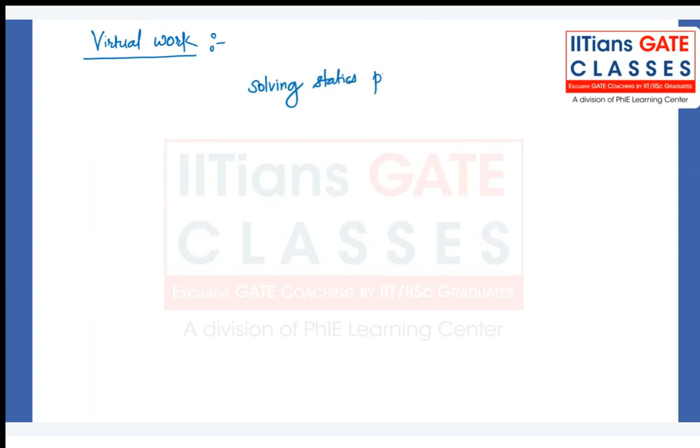So, solving problems of statics - there are two ways to do it, either with the equilibrium equations. You know, equilibrium equation, summation of all forces equal to 0, summation of all moments equal to 0, right? Depending on direction, you will apply summation x, summation y, and all. And there is one more way, that is virtual work method.

So it is not mandatory that the problem should be solved by virtual work only, and that is the reason we have not studied it when we were studying the statics problem. Generally everyone prefers the equilibrium method, and it is commonly used to solve the problems. But there is an alternative method. You should be aware of it, and you may not be using it in future, but it will be good that you are aware of this. So that is the reason we are studying it here.

It's optional, not necessarily required - you can still solve the problem with the equation of equilibrium, and we use it in statics mainly.

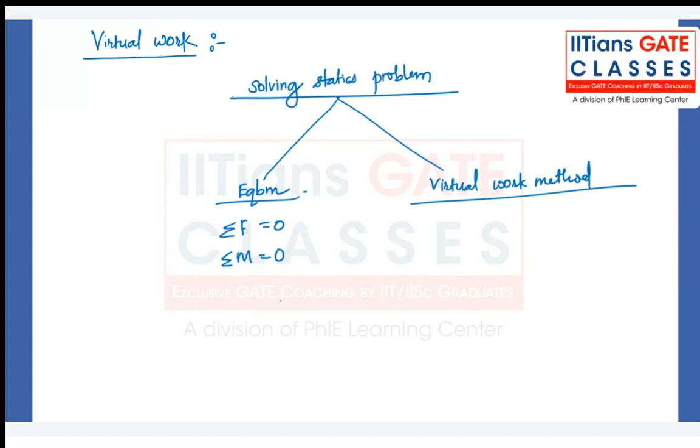So when a body is in equilibrium, there is no displacement, we can say. Body is at rest, and then we say it is in the equilibrium, and summation of all forces and moment equal to 0. But if we imagine a displacement, let's assume a displacement, let's call it a virtual displacement.

What is the virtual displacement? You can denote it by delta theta or delta s, whatever you want - you can give the notation. Generally delta s and delta theta are used for linear displacement and angular displacement respectively. This virtual displacement is an arbitrary, infinitesimally small change in the position of the particle.

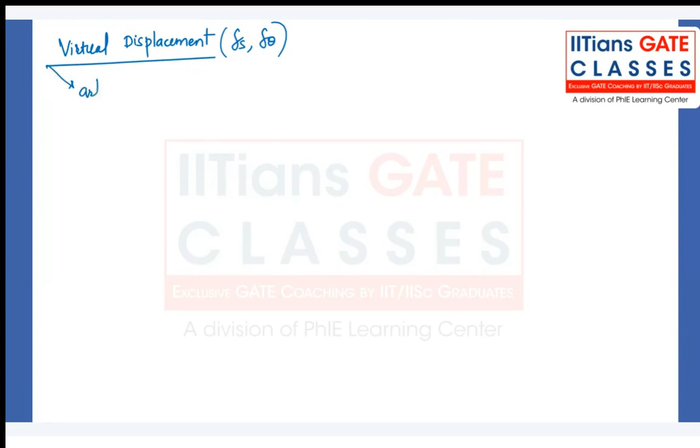And consistent with the constraint imposed on it. So write down the definition of virtual displacement: virtual displacement of a particle is an arbitrary, infinitesimally small, very small change in the position of the particle, consistent with the constraint imposed on the particle.

So it's an imaginary displacement. In reality it is not happening, because the body is in equilibrium, it is at rest, it is not moving. But in order to solve it, we are assuming, we are imagining that there will be a small displacement, let's say delta s, and that will help us to calculate work, because force into displacement is work, and it will help us to solve the problem.

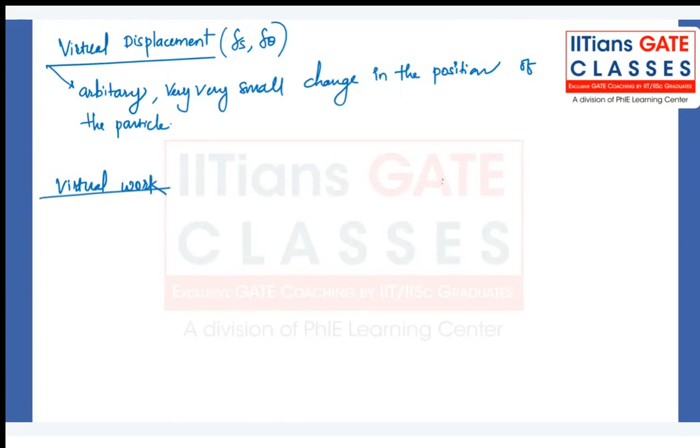So if we have a body like this, kept on a horizontal surface, and a force P is applied, and the body has an imaginary displacement delta S, then the work here will be P cos of theta.

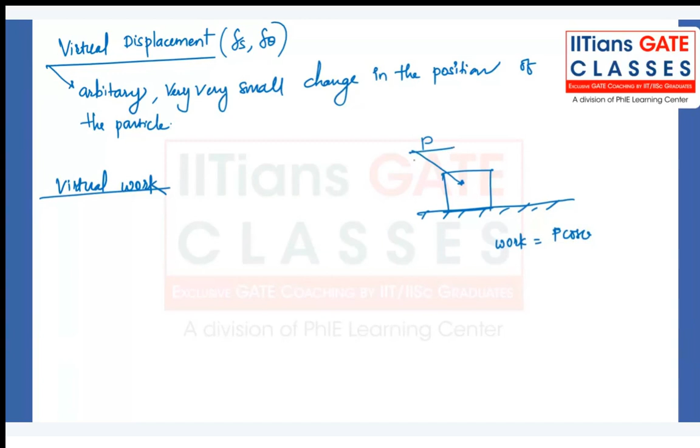P cos of theta into delta S. Delta S is a virtual displacement. This work I'll call virtual work.

Similarly, if we have a beam and you are applying some moment on it, and because of this moment there is a small change in angle, that is delta theta, then the work done because of this moment is moment into theta, and in this case I'll call it virtual work.

So what is virtual work? Virtual work is the work done in producing a virtual displacement.

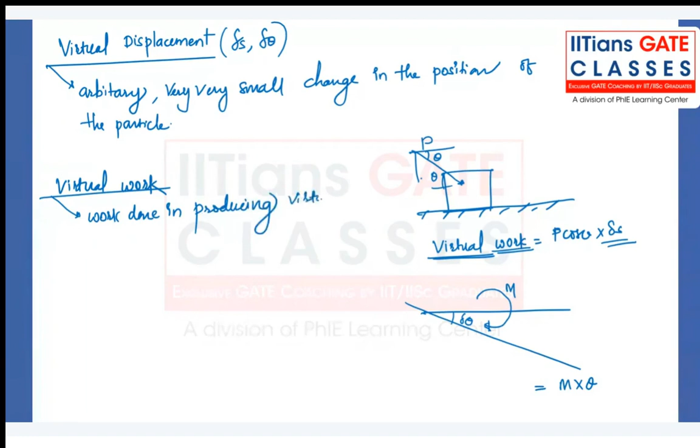So delta U, let's say virtual work, generally we denote it by delta U, and that is equal to F times delta S. Now we know what is virtual displacement, we know the force, and we also understood virtual work. But what is the principle of virtual work?

What does this principle say? Write down the heading: principle of virtual work.

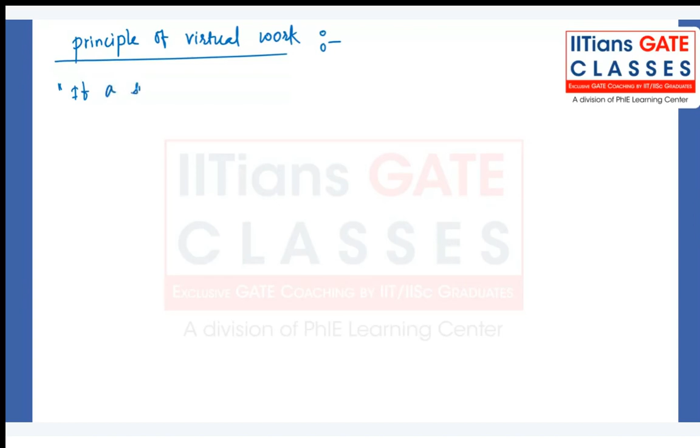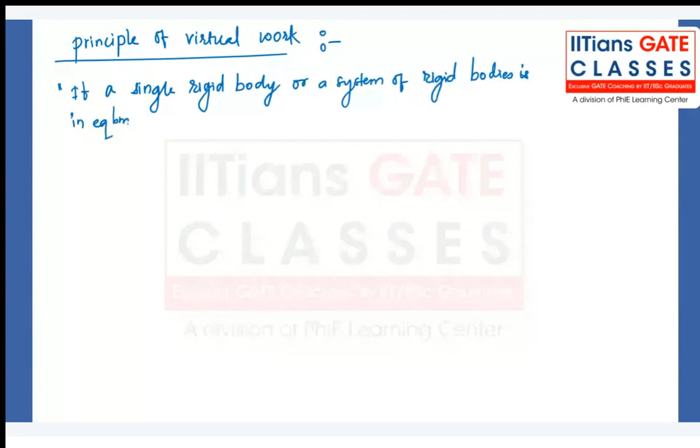If a single rigid body, or a system of rigid bodies, is in equilibrium, then for any virtual displacements within the constraints on the system, the virtual work done on the system is zero.

So this is the statement of the principle of virtual work. In short, the total virtual work of external forces acting on the body is zero.

Or in other words, constraint on the system means the supports which you are giving. So you are, let's say, giving a fixed support at one end, or a roller support at the other end, and keeping it the same. It means your reactions will remain the same, they will not change.

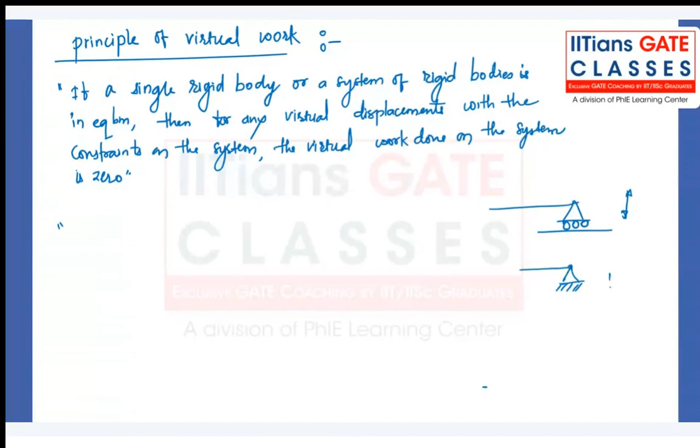So whatever constraint means, let me explain: if you put a roller support, it means you're putting a constraint on the virtual vertical motion of this beam. If you put a pin joint, you are putting a constraint not just on the virtual vertical displacement but also on the horizontal displacement. And if you have a fixed support, then you are constraining the vertical direction, the horizontal direction, and also the moment.

So constraint means whatever restrictions you have made in the problem before, they will remain unchanged. Is it clear? Constraint is the opposite of freedom, degree of freedom.

So in other words, in simple words, the statement can be written as: the total virtual work of external forces acting on the body is zero, for any virtual displacement of the body.

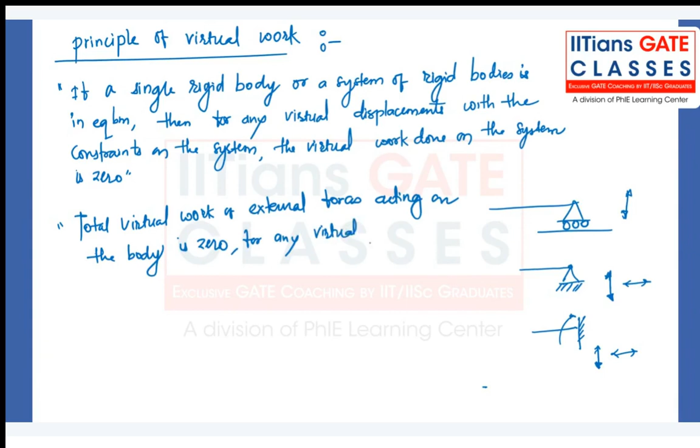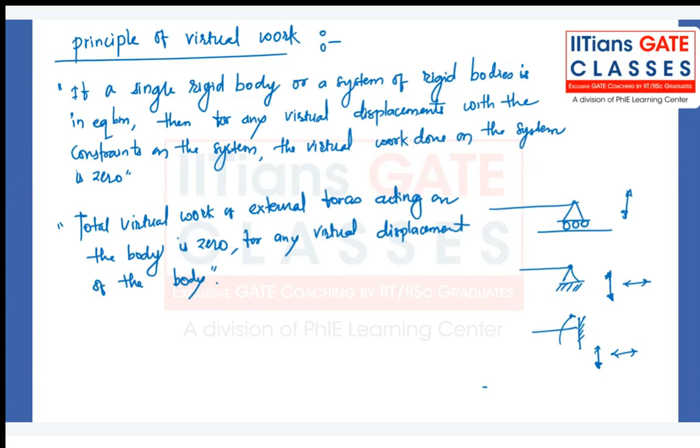So in this way also you can write the statement. Let's start with a simple understanding of it. So if I give you a block and ask you to apply the equilibrium equation to it.

Suppose if I put a block of weight W and ask you to calculate the reaction because of the ground, so what you will say is: this block is at rest, it is in equilibrium, so the summation of all forces in the vertical direction has to be zero. The ground will create a vertically upward reaction, that is N, and hence N will be equal to the weight of the body. That's all you will say, right? There is no need to do any complexity in this.

But now, if you want to apply the principle of virtual work to this, how will it look? So let's say this is the centroid G, and imagine that G is moved because of the weight to G dash, something like this. There is a change in position in the vertical direction from G to G dash, and this position change is delta Y. So in the y direction we assume it as delta Y.

So what is the work done because of this virtual displacement delta Y?

Displacement is downward, weight is also acting downward, so it's a positive work, W into delta Y. Force is up, reaction is upward, so N times delta Y is equal to 0. According to the principle of virtual work, this is the total work done because of the external forces acting on the body, and that has to be 0.

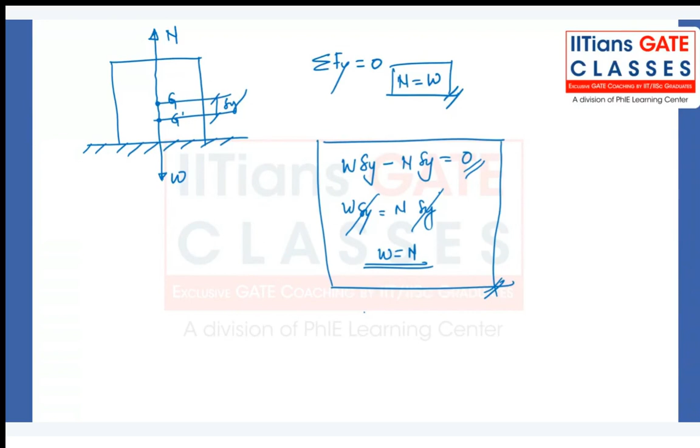Generally everyone feels this is complicated or unnecessarily an extra work we are doing by applying the principle of virtual work, and nobody uses it mainly in real life, because the equations of equilibrium make life a little bit easier than the virtual work concept. But still you should be aware of it. In some cases, if you need, you will be able to solve it, maybe in some theory questions in future.

But for GATE, they'll not specify anything that you have to solve the problem by virtual work or this. They just need the reactions, or they need the force. Then you will be able to calculate it just by equations of equilibrium.

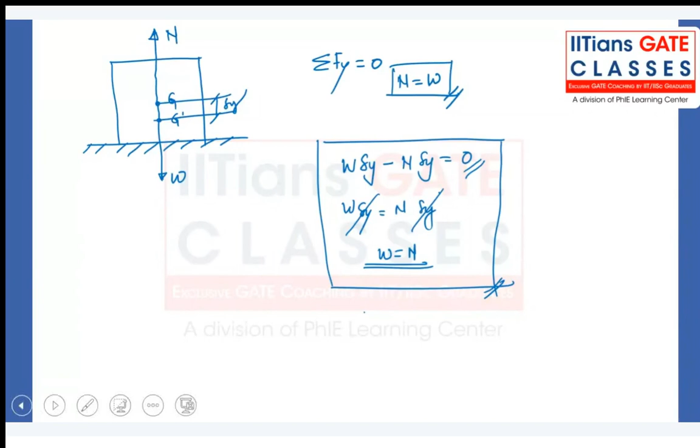In the same way, if I give you another simple question, let's start with a simple question first, so that you will be aware of it, and then I'll bring a problem of beams to make the concept clear.

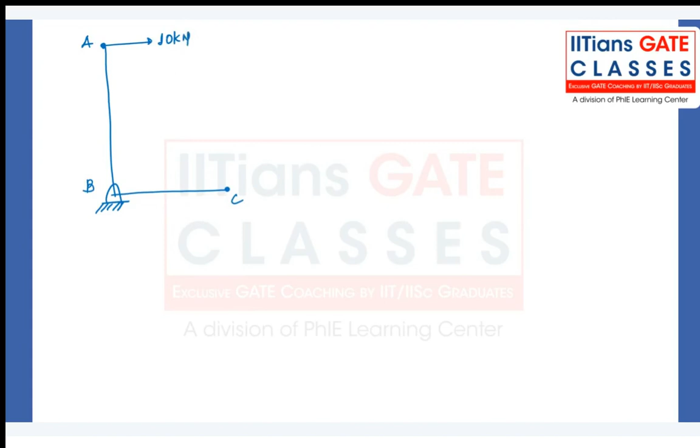For example, this is an L-shaped arm, and this point is A, this point is B, and this point is C. At point A we are applying 10 kilonewton of load. AB is 2-meter long arm, and BC is 1 meter. It's completely a single system ABC, and C is supported by the roller support, so you will have one reaction here, let's call it RC. B is supported with the hinge support, so here you will have two reactions, BX and BY.

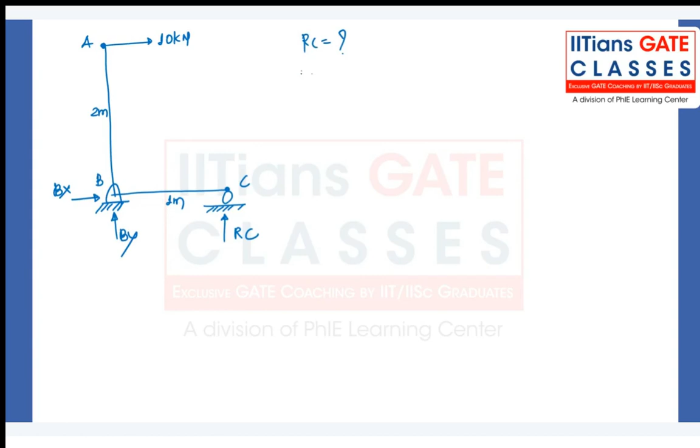They are asking you to calculate the RC. How will you calculate RC? You will say, if I take moment about point B, I'll get the value of RC. So it is very simple: summation of all moments about point B is equal to 0. This is an equation of equilibrium you will apply. So you'll say 10 multiplied by 2 has to be equal to RC multiplied by 1. This implies RC is equal to 20. That's all, within a few seconds you will get the answer.

But if I ask you to solve this by virtual work, how it will look like is like this. Imagine that you are turning this with a displacement delta theta. So something like this it will look. Delta theta displacement, and let's say this is YC, the displacement here, and XA is the displacement over here. YC is the vertical displacement of point C, XA is the horizontal displacement of point A.

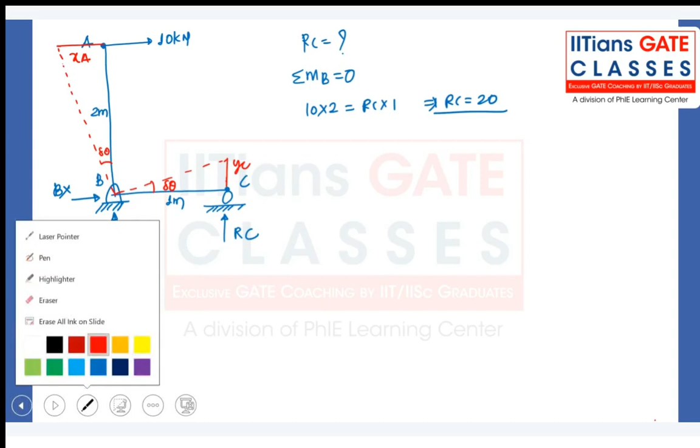So if I want to calculate the value of XA, how much it will be? Apply the logic here, that is R theta, for a small displacement. So it is 2 delta theta, I can say, and YC I can say it as 1 times delta theta.

Now if you calculate the work done here, 10 is applying in rightward direction, but displacement is leftward, so it's negative work, minus 10 XA. Here RC is applied in the same direction as the displacement, so it's positive work done, RC into YC, that is equal to 0. Now if you put XA value, 2 times delta theta, plus RC times YC, 1 times delta theta, equal to 0, you will get RC is equal to 20, delta theta will cancel.

In this way also you can find, but you can clearly see here, compared to equation of equilibrium, this is a bit complicated, or takes a little more time, I would say, rather than saying it as complicated. But this is the way you can convert the problem into the work done, and total work done of the system is 0, and that's how you will calculate the reactions.

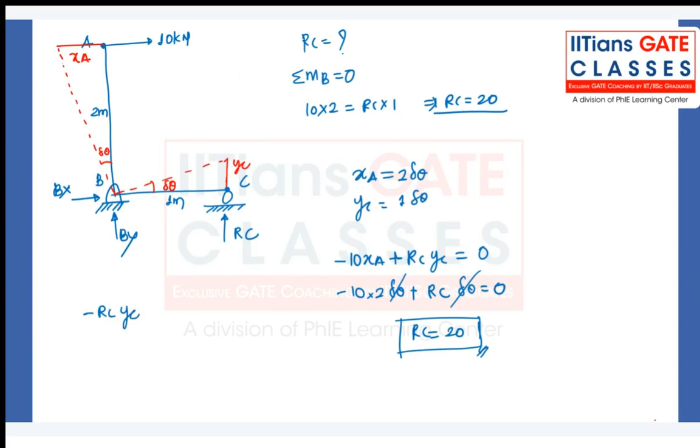Yes Abhishek, you can assume it as a clockwise moment as well. So if you rotate it clockwise, what will happen? RC will be upward, but your YC will be downward. So the equation will look something like this: minus RC into YC, and XA will be in the direction of 10, so plus 10 into XA equal to 0. This is how your equation will look like, Abhishek. Is it clear?

And ultimately, you put this value, you should get RC is equal to that.

Yeah Sandeep, you can ask your doubt. You have raised your hand. Feel free to ask, you can unmute and ask. Yes sir, same question I was asking. You got it after that, that's why I was saying to come back. Okay, yes, no problem, sir.

So yeah, in any direction you can take it, it's your choice. Maybe I will explain once again through this figure as well, so here we will rotate it clockwise as well as counterclockwise, so you will feel comfortable.

But I would suggest you not to use this method in your GATE exam, and use only one equation of equilibrium. The previous question I did not write, sir. Okay, I'll wait for 2 minutes, you can write and just put a message in the group once you are done.

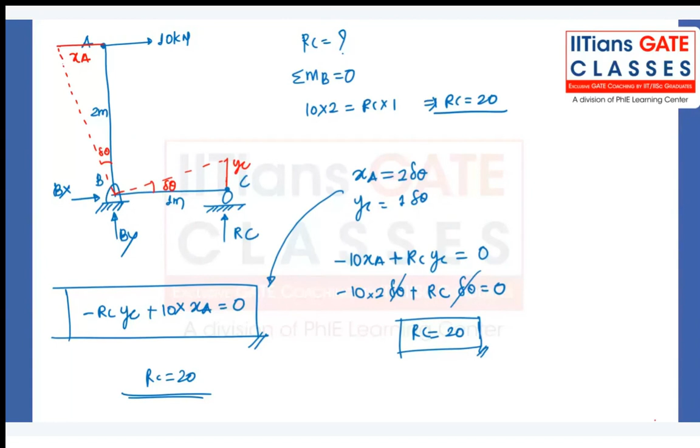Okay fine, then take a next question. We have one, let's say at A a support, and at other end we have roller support, let's call this point as C. Here we have point B, and then we have point C. At point B, we are applying a load of 10 kilonewton. Point B is kept at 2-meter distance from A, and C is at 3 meters distance from point B. So the question here is calculate RC.

So if you want to use the equation of equilibrium, within a second you can answer it. 10 multiplied by 2 is equal to RC multiplied by 5. Hence RC will be equal to 4.

That's all, correct. But I want you to solve this question by virtual work, because we are studying that concept.

So imagine that this displacement, the displacement of the points A, B, C, either about point A. Let's consider about point A they are rotating, because we are putting the constraint at point A. So imagine it like this, because at point C it can freely move. You can either do it at point C, that's not a problem, but let's keep it at point A because we want to find the reaction at point C. I'll suggest you like this.

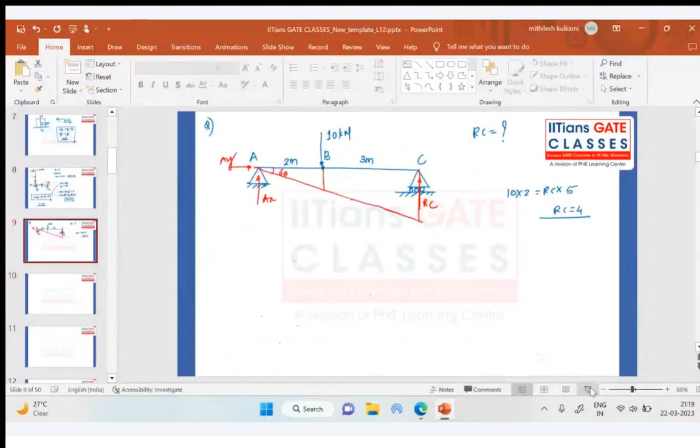So I'll share again. So now let's say this is a displacement at point B, we can call it YB, and here this is YC, the displacement. B to B dash is YB, and C to C dash is YC.

So what is YB displacement? YB here is delta theta into 2, so you can say 2 delta theta. And what is YC here? It's 5 delta theta.

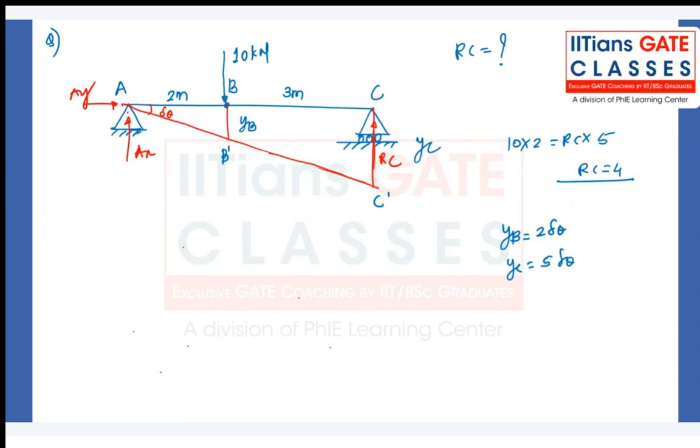And now, according to the principle of virtual work, total virtual work is equal to 0. And how much is the total virtual work here? We have 10 into YB minus RC into YC equal to 0. We are considering this as positive work, and this as negative work, because of the direction of the force and the displacement direction. If it is same, we consider it as positive; if it is opposite, we consider it as negative.

So from this, what we will get is 10 times YB is equal to RC times YC. So what is YB? YB is 2 times delta theta, and YC is 5 times delta theta. So delta theta will get cancelled. 20 divided by 5 is 4. So RC is equal to 4 kilonewton.

Okay, so the problem you can solve either by equation of equilibrium or by virtual work. It's more or less the same, but generally I would suggest you use the equation of equilibrium, because this virtual work approach adds a little bit of complexity to the problem and will take more of your time.

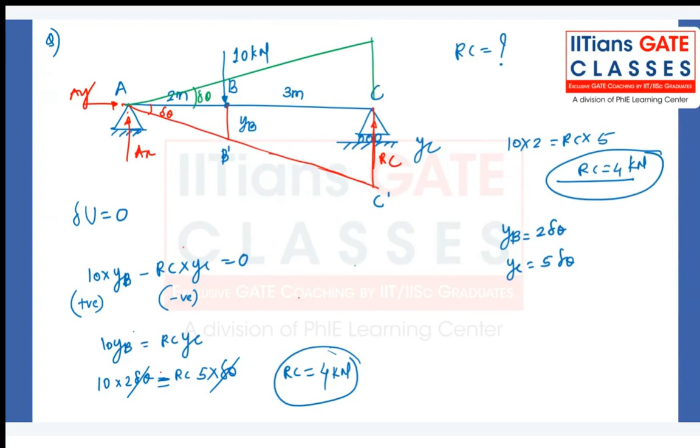Okay, this is the system, and in this problem as well, Sanjeev and Abhishek, you can rotate it in this counterclockwise direction as well. It's not necessarily that it has to be in the downward direction. It's your choice, you can rotate it in counterclockwise direction by delta theta, it's equally correct. So here, this problem, I'll give AB as the beam, okay, simply supported beam, and then we have a 10 Newton force.

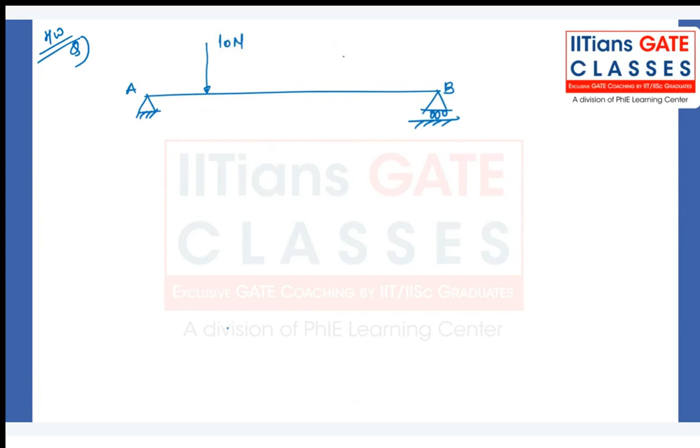Then we have a 20 Newton force. This is 2 meter distance, this is 1 meter distance, and this is again 1 meter distance. Okay, total is 4 meter distance.

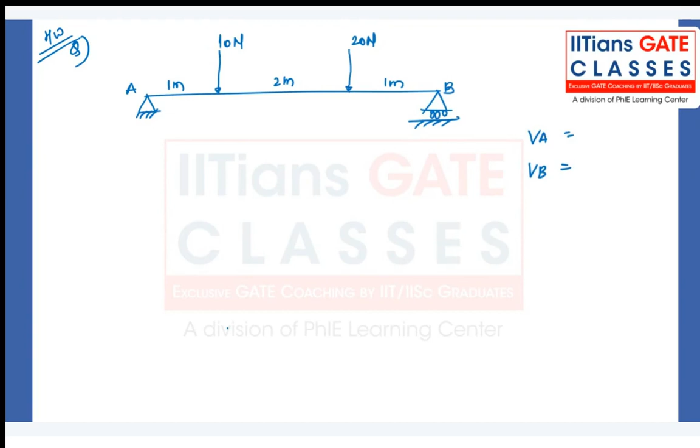What you have to calculate is VA and VB, both of them, and try to calculate using the principle of virtual work. I'll give the answers: VA is 17.5 Newton, and this is 12.5 Newton. You can easily calculate by equation of equilibrium, by taking moments and summation of vertical forces equal to zero. But I want you to try this problem with the principle of virtual work. If you face any difficulty, feel free to reach out to me, I can help you with the answer. So take this for your homework.

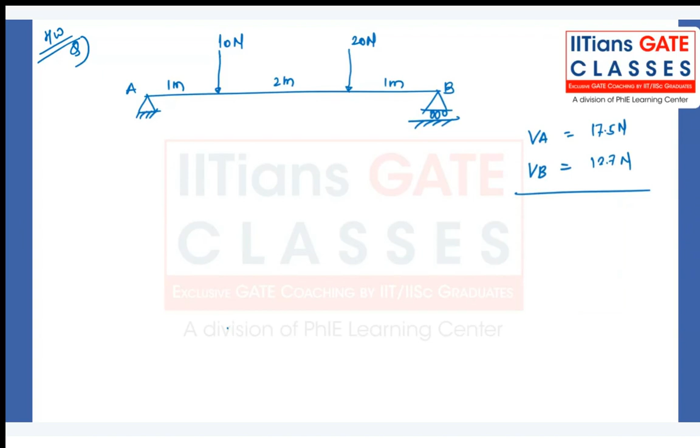Write down next heading: Lagrange's equation.

Lagrange equation. We are studying it at the end because it's not the only method to use in kinetics in order to generate the equation of motion. When you study the vibrations topic, you will understand how to create the equation of motion, and there are a variety of methods to create it.

For example, potential energy equal to kinetic energy, or sum of all the energy equal to zero, or you will use the equilibrium method. So a couple of methods are there which will help you generate the equation of motion for the system.

And what we use is D'Alembert's principle, right? We use D'Alembert's principle to generate the equation of motion and solve it. So, for example, let's introduce it like this: in mechanics, either you can use this approach, the Newtonian approach,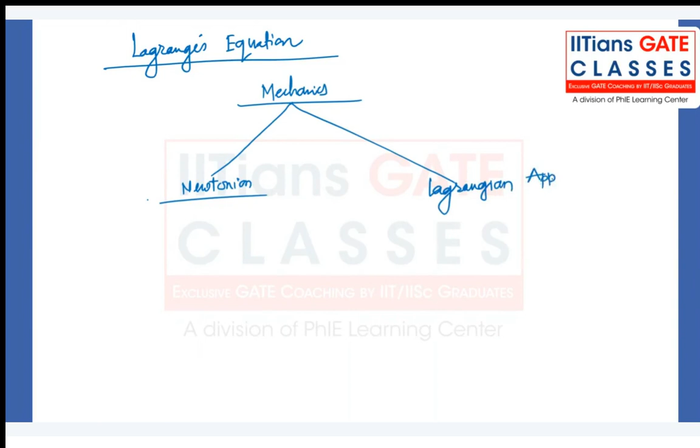Newtonian approach, or Lagrangian approach. So what is the difference between them?

We know in Newtonian approach how it works. It works on summation of the forces is equal to mass times acceleration, and then you applied ma as an imaginary force or inertia force opposite to the direction of motion and solve the problems.

So we have generated the free body diagram, and then we calculate the forces on it, and then applied the dynamic equilibrium considering this equation. That is what we have done in the Newtonian approach, which works on D'Alembert's principle. Or even the work energy principle also we studied - there also we calculated the free body diagram, forces, and then applied the work energy principle.

But how does this Lagrangian approach work? It is based on energy formulation, and it looks like this - let me go to the next slide. The Lagrangian method is revolving around a parameter called L.

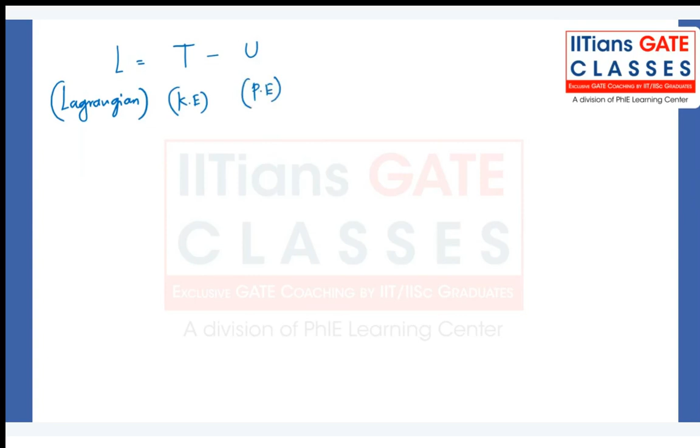So what is this L, T, U, and all, we will see, and how it will help to generate the equation of motion - that is the main question. So what is this L? L is Lagrangian, and it is the function of Q, Q dot, and T.

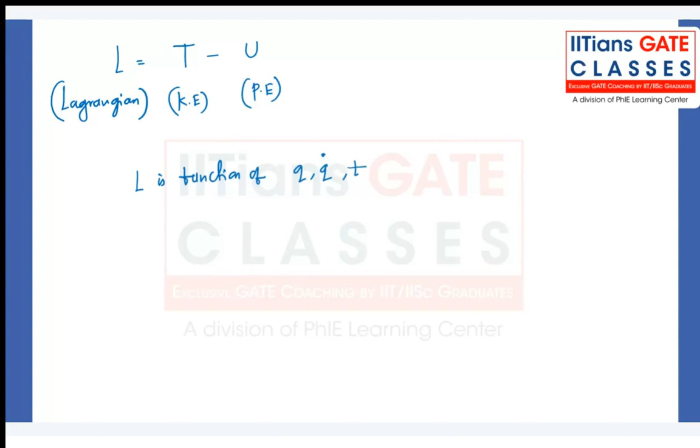What is this Q, Q dot, and T? We know T is time. And what is this Q and Q dot? Q is any generalized coordinate - it can be X, it can be Y, it can be Z, theta, anything.

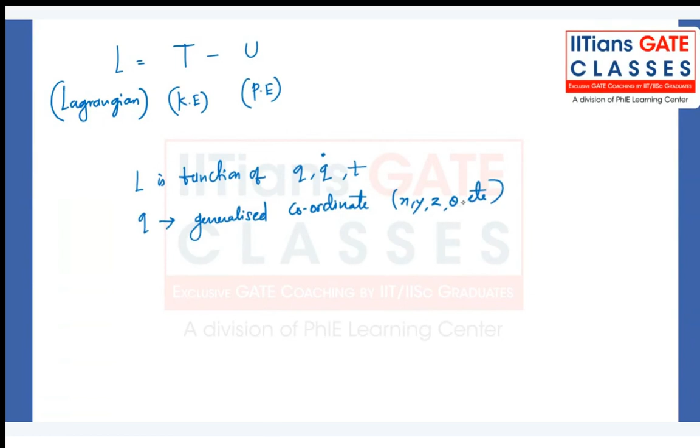So in a linear system, it will be X, Y, Z. What is Q dot? It is generalized velocity, you can say, because differentiation of displacement with respect to time is Q dot - it is differentiation of Q with respect to time, and you can say it as velocity. So it's a generalized velocity.

And what is T? T is the time. So what we can say is L is function of Q, Q dot and T. It means indirectly L is the function of X, Y, Z, X dot, Y dot and Z dot, and T.

And how this L will help us generate the equation of motion is d by dt of dou L by dou Q dot, minus dou L by dou Q, equal to 0. So this is the equation of motion, or you can call it the Lagrangian equation.

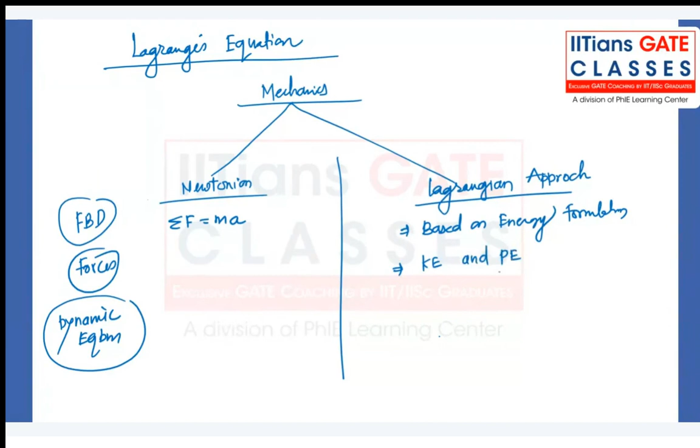Okay, write down from the beginning now. I hope you're done with this first slide. I just explained the two different approaches. One is the Newtonian approach, based on the summation of forces equal to mass times acceleration, whereas the Lagrangian approach, as I said, is mainly based on the kinetic energy and potential energy. Lagrangian L is equal to kinetic energy minus potential energy. So the difference between them is L.

And here I'm explaining how it is related to, the L is a function of what? L is a function of x, y, z, x dot, y dot, z dot, and t. Let me know once you're done with this slide.

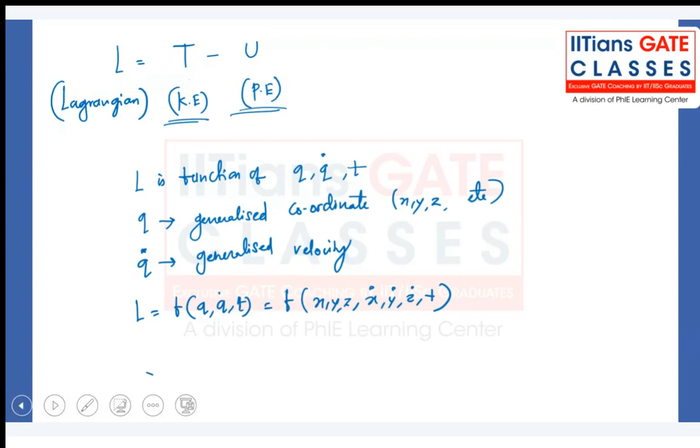You can also write down the next equation like this. This equation is for the conservative force system. And the same equation will look like this: d by dt, dL by dQ dot, minus dL by dQ equal to F non-conservative.

So this equation is for the non-conservative force system. This is for non-conservative force system. So what is a non-conservative force system and what is a conservative force system?

The force where the work done is independent of path but depends only on the initial and final positions, we call that a conservative force system. For example, gravity force, spring force, or tension in a string are considered conservative forces. Non-conservative forces include, for example, fluid friction, normal friction, or air drag in the system. If you want to consider these in the problem, then it belongs to a non-conservative force system problem, and in that case you'll use the second equation.

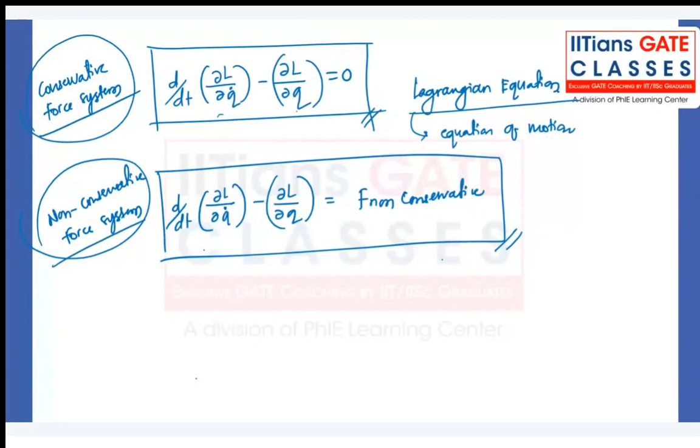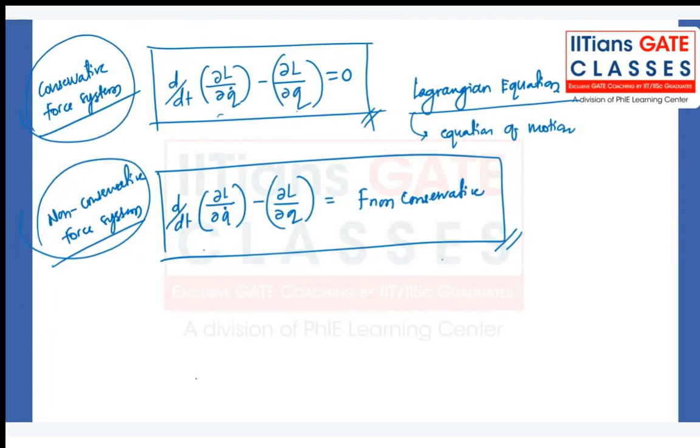So let's start with some simple questions first. For example, if I give you this: a ball is freely falling downward, and if I ask you to calculate the equation of motion in this case, how will it look like?

How will it look like? Or let's say we have a ball of mass m freely falling downwards. Let's see how the acceleration will look like in this case. What will be the acceleration in this case?

Yeah, it is g. So it's a freely falling object. Mg will be the weight acting downward, and inertia force will be mass times acceleration. You can easily say the acceleration in this case is just the acceleration due to gravity. But you are not applying the Newtonian approach here.

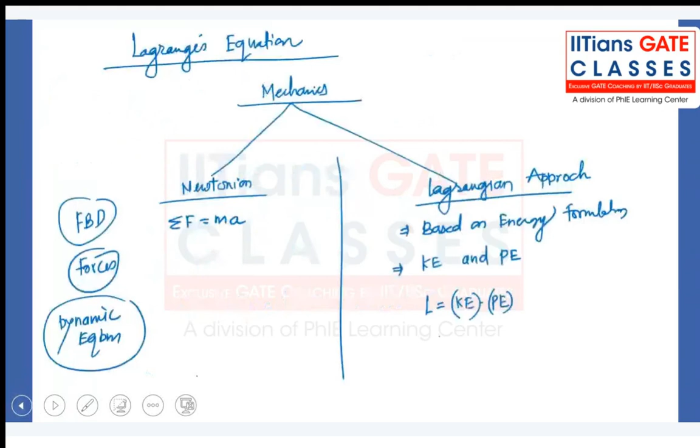So in this case, the motion is along the y direction. So the q, as I said, what was the q? Q was the dimensions, right? Generalized coordinates you can say, and here that coordinate is y. So q is y in this case, and q dot will be y dot, that is the velocity in the y direction.

Let's consider this as the y-axis and this as the x-axis. So our motion is only in the y direction, so our focus will be only on the y coordinate. How will the kinetic energy look like? T is kinetic energy.

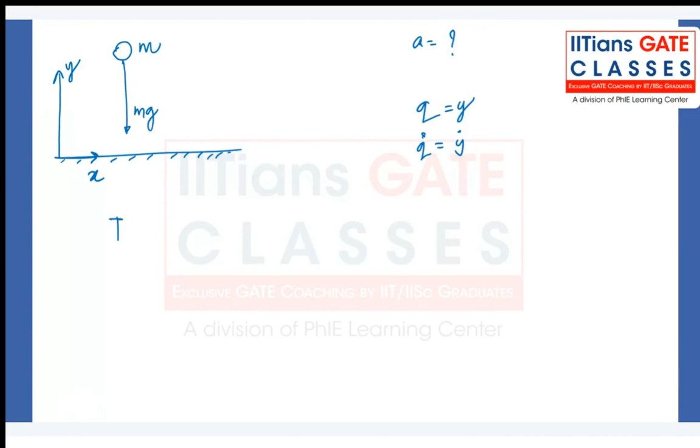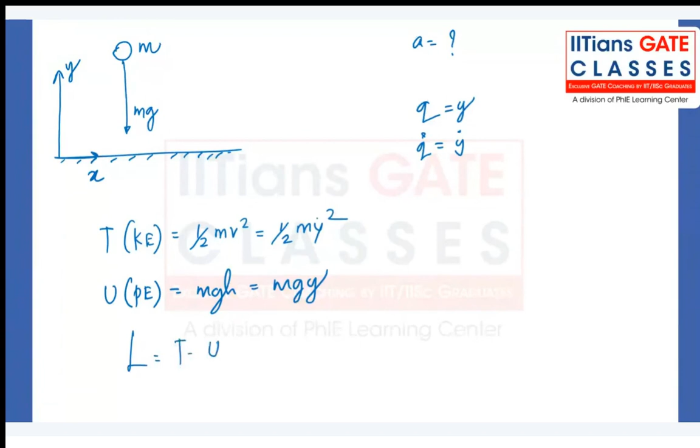Half mv square is the kinetic energy, so it will look like half m y dot square. Is that correct? How will the potential energy look like? Mgh, right? Mgh, and that will be equal to mgy. And how will the Lagrangian parameter look like? That will be equal to T minus U, so it is half of m y dot square minus mgy.

Is it clear till this? So L will be equal to half m y dot square minus mgy. Let me go to the next slide to solve it further. Or before that you can write it down and let me know once you are done with this slide.

Are you done with this slide? Yeah, okay. So what was the L? 1/2 m y dot square minus mgy. And what is our equation of motion? If you remember, d by dt of del L by del q dot minus del L by del q is equal to 0. This is our equation of motion.

So calculate these derivatives and put it into this equation. How will del L by del q look like? It will be minus mg, because del L by del q means it is del L by del y. Q is y in this case. Similarly, del L by del q dot is del L by del y dot.

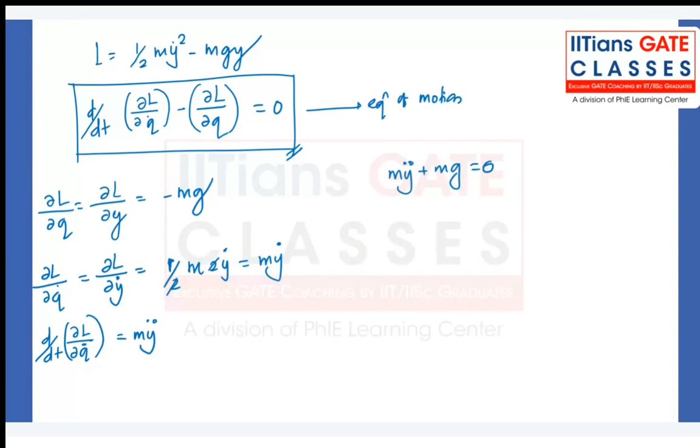Just put it back into this equation - this is this parameter, and this is this parameter. And the equation of motion will look like this. The m's get cancelled, y double dot is equal to minus g. So it means acceleration is minus g, because the negative sign indicates it is in the downward direction.

Okay, any doubt in this question? Is it clear to you all? So this is a simple situation I have given, but maybe you will understand it better when you study the vibrations topic.

Because in the vibrations topic you have to prepare the equation of motion. In a mechanics problem, if you just want to calculate, let's say, acceleration or force or displacement, velocity and all, you don't need the complete equation of motion, because you have other approaches to solve it. For example, D'Alembert's principle - it does the same thing actually, but comparatively simpler than this, and you should be able to solve it with that as well.

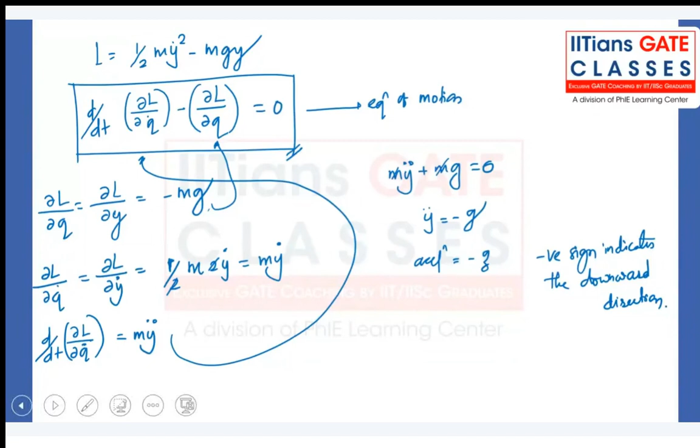I'm sure that whoever will be teaching you vibrations, they will again introduce this topic to you there, so you will be aware of it during vibration. But anyway, I will take an example here of a spring mass system so that it will be clear to you all. So in such kind of situations, you can go for this equation, the Lagrangian method.

Sanjeev Kumar, for single degree of freedom systems, yes, you can do it. Even for 2 degree of freedom systems, where more than two variables are there, you can use this method. It's not restricted to single degree of freedom systems; you can use this method for 2 degree of freedom systems as well.

It's your choice which method you want to use, whenever you feel it's better, because whenever you study vibration, the teacher will introduce you to methods you can use to generate the equation of motion. So what I think is the Lagrange equation can be used from a mechanics point of view.

I would say whenever a spring mass kind of system is there, it will be better if you apply this method. But in the rest of the cases, I would suggest you just go for D'Alembert's and work energy principle. Don't even try for this method, it will unnecessarily take more time. It's still optional, it is not necessary that you should solve the problem with this. It comes with some additional complexity and more time.

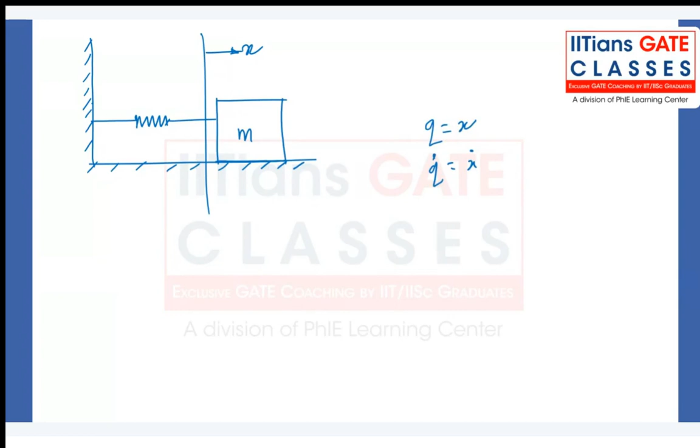Let's say this is the displacement x. Here the generalized coordinate is x, q dot is x dot. Now, if I ask you to calculate the equation of motion, how will it look? In simple words, mx double dot plus kx equal to 0, right? This is how it will look. You might have studied this kind of equation before, mx double dot plus kx equal to 0.

So it's an equation of motion when you don't have any damper in the system, because the damper is not attached, so that term we are not putting into the equation. And it's a free vibration because we are not showing any force here, so that's why equal to 0 on the right hand side. It's a typical equation of motion, simple harmonic motion, where we don't have any damping, and it's a free vibration.

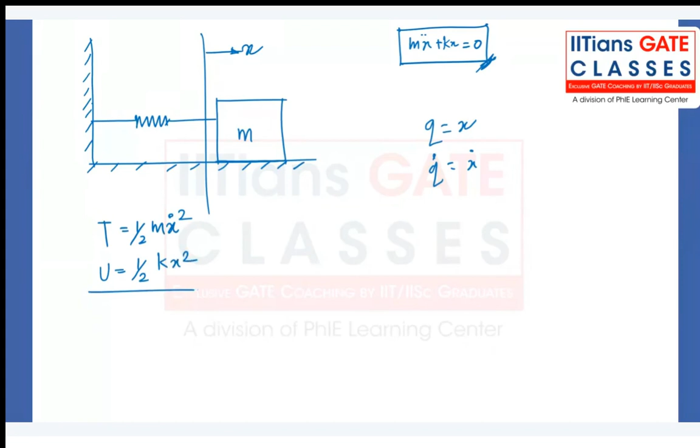So how will you generate this equation by the Lagrangian method? You will first calculate the kinetic energy T, that is 1/2 mv square. V is x dot here, so x dot square. Kinetic energy is that, potential energy is U, half of kx square. This is the potential energy of the spring with spring constant k, stiffness k. So the Lagrangian L can be written as T minus U, which equals 1/2 mx dot square minus 1/2 kx square. So this is your L.

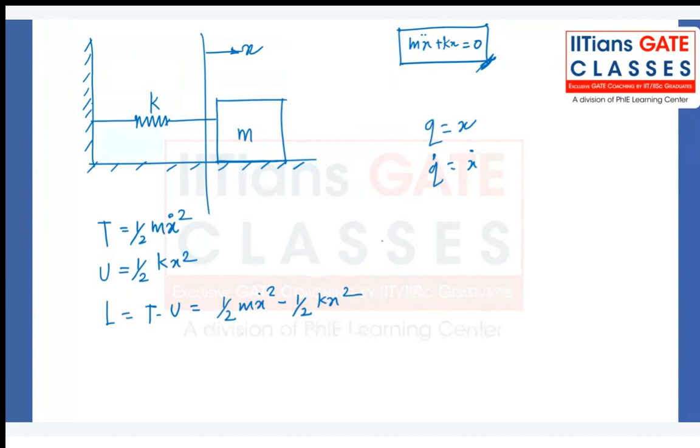So how does dou L by dou x look? It will be minus kx. How does dou L by dou x dot look? It will be mx dot. And how does d by dt of dou L by dou x dot look? It will be mx double dot.

So if you put this into the equation of motion: d by dt of dou L by dou x dot minus dou L by dou x equal to 0. If you put these in, you will get mx double dot plus kx, minus minus becomes plus, equal to 0, and this is what I have already written before. This is the equation of motion. You can still solve the problem by using D'Alembert's principle.

Okay, you can still solve it by D'Alembert's principle, because mx double dot will be the inertia force there, and kx will be the spring force, so ultimately you will end up with the same equation.

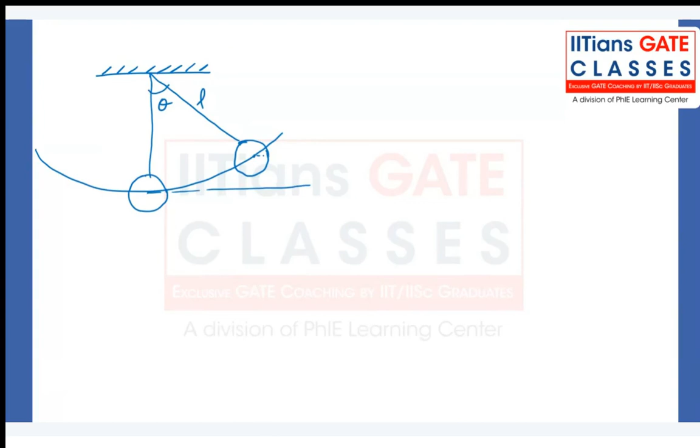Take a simple pendulum, rotated with angle theta, and L is the length. This is L times 1 minus cos of theta, and m is the mass of this ball. Can you tell me how the equation of motion will look like for the simple pendulum of mass m attached to a massless string?

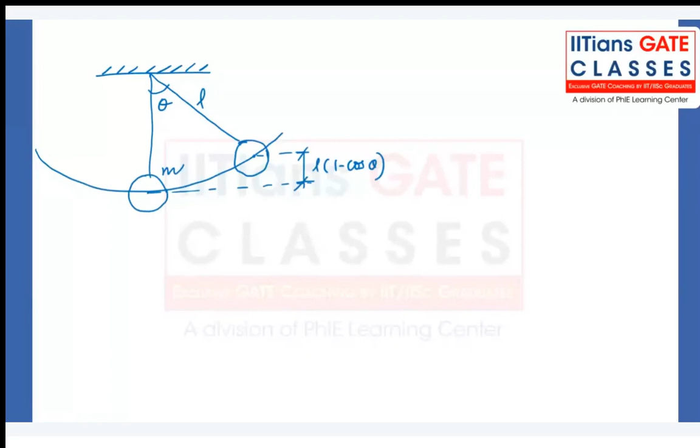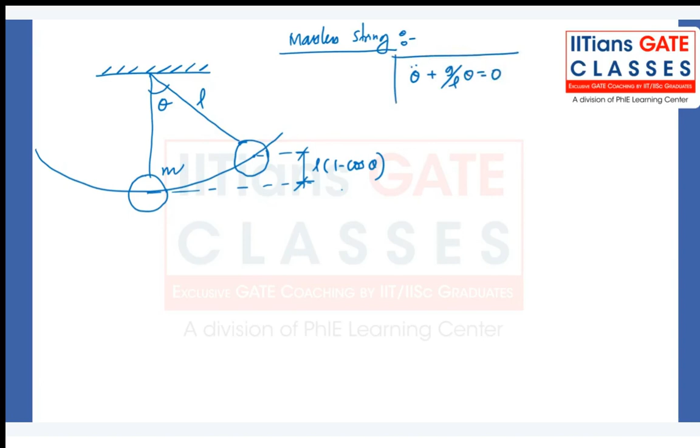You might have studied this equation before, during class 12th or first year maybe: theta double dot plus g by L theta equal to 0. Have you seen this equation before? Natural frequency of simple pendulum you might have studied, right? Omega is root of g by L. So how is it calculated? It's calculated based on this equation of motion. And how is this equation of motion generated? By different methods, and one of the methods is this.

Either you can use D'Alembert's principle or you can use the energy method. As of now we are studying the energy method, so focus on it. Calculate the Lagrange parameter, which is T minus V, and solve it.

Yes Sanjeev, that method is also correct. Kinetic energy plus potential energy is constant, and differentiation of the total is equal to 0. So yes, you are also correct. That is what we have studied in the work energy principle, right?

What is this? Let's say total energy, kinetic energy plus potential energy at some location, and kinetic energy plus potential energy at some other location - it is same basically, right? So it is energy changing from one form to other. If it remains constant, then its differentiation with respect to time is zero. So that approach also you can use in order to generate the equation of motion.

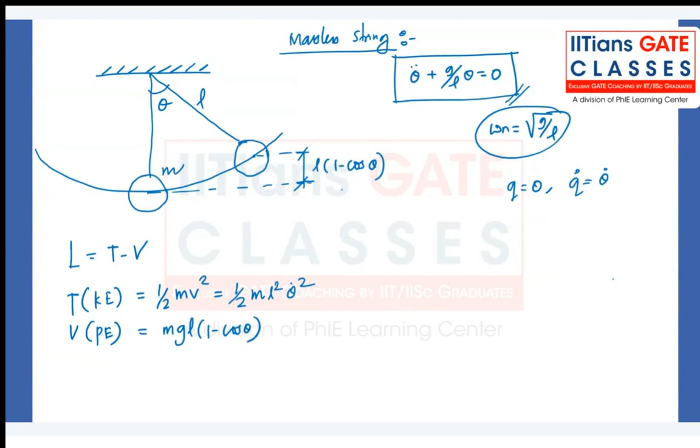Potential energy V will look like mg h. H here is L times 1 minus cos of theta, so it's mgL times 1 minus cos of theta. So like this you can calculate the kinetic energy and potential energy.

Yes Sanjeev, you can write kinetic energy as half I omega square, and I is equal to ml square in this case. So that method is also correct, or you can use this method, whichever you feel you want to use, you can use it.

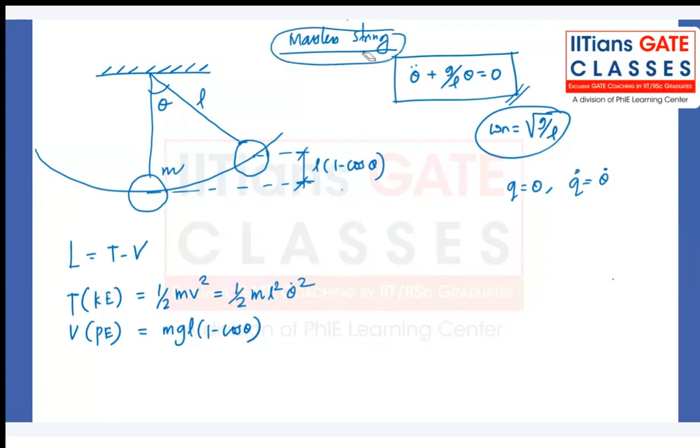So here we are considering a massless string, so you should not consider the mass of the string at all, just consider the mass of the ball. So these are the two energies you will get, and how the L will look like.

I'll go to the next slide to write L. 1/2 m L square theta dot square. And what is the potential energy? Minus mgl times 1 minus cos of theta. So if you simplify it, it will look like this: half ml square theta dot square minus mgl plus mgl cos of theta. So this is L.

Differentiation of L with respect to Q means what? Dou L by dou theta, and that is minus mgl sin theta. Differentiation of L with respect to theta dot is what? M L square theta dot - this half and 2 will get cancelled.

And d by dt of dou L by dou q dot is ml square theta double dot. So if you put it in the equation, d by dt of dou L by dou q dot minus dou L by dou q equal to 0. This is the equation of motion.

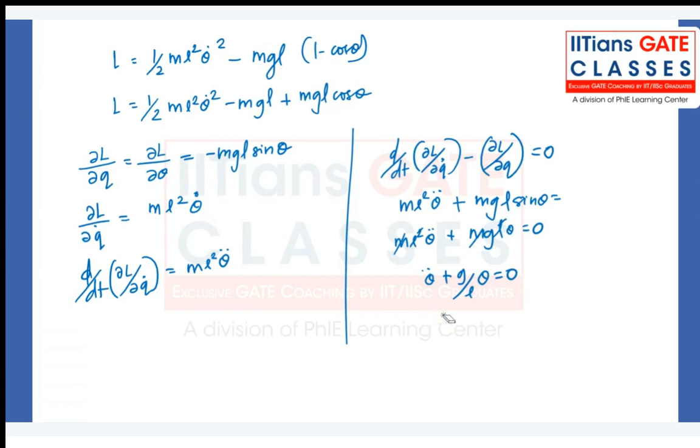So if you compare with this equation, theta double dot plus omega n square theta equal to 0, the natural frequency of this is under root of G by L.

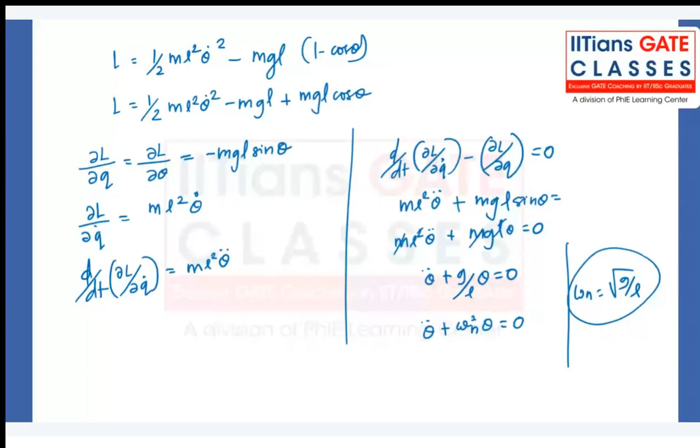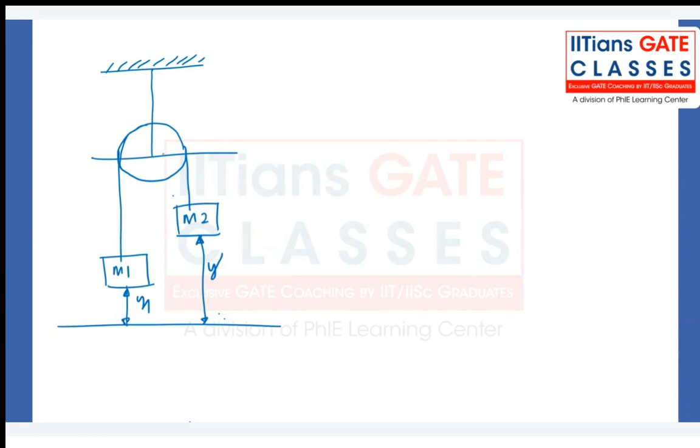Okay, take this system, pulley system, you know we have solved this kind of problem a lot. M1, M2 are the two different masses, and from the datum, let's say they are kept at distance of x and y. At this moment, this is how it will look like. R is the radius of the pulley. Ignore that - assume it as massless and frictionless pulley. With this assumption, try to create the equation of motion for this problem.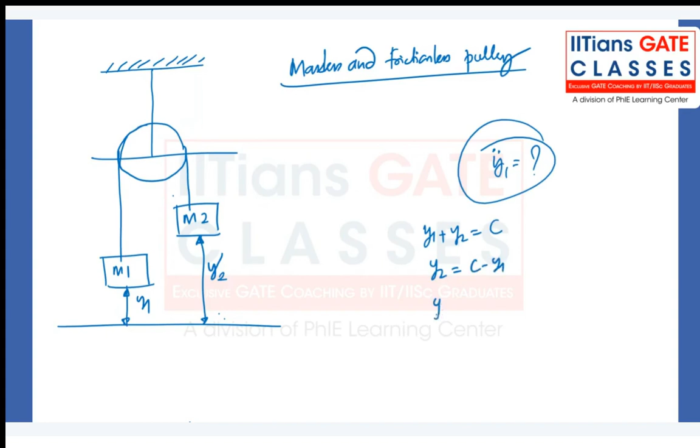Spend some time on it and post your answer. I have given you the y1 and y2 displacements, you can find a relationship between them. Say y1 plus y2 is equal to constant, because if y1 is increasing, y2 will decrease, y2 is increasing, y1 will reduce, but ultimately the total sum is constant. So how will you write y2 equal to c minus y1. So y2 dot will be equal to minus times y1 dot. So this is how the coordinates will look like.

Now you can work on the kinetic energy and potential energy. T is the kinetic energy, how the kinetic energy will look like.

There are two different masses. They'll come up with two different kinetic energies: 1/2 m1 y1 dot square plus 1/2 m2 y2 dot square.

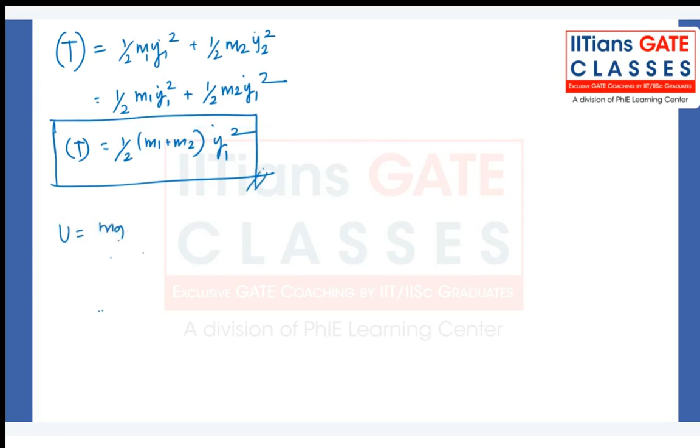We just found one relationship between y1 dot and y2 dot, that is y2 dot is equal to minus y1 dot, but its square will again be positive. So it becomes 1/2 m1 y1 dot square plus 1/2 m2 y1 dot square, which is 1/2 (m1 plus m2) y1 dot square. So this is the kinetic energy. Now how will the potential energy look: m1g y1 and m2g y2, which becomes m1g y1 plus m2g (c minus y1).

Okay, we got one question here. There is a negative sign. Where is the negative sign? It's a square, right? So if you square a negative number, that will be positive.

Why is it negative, Nishant? Why are you saying it is negative? We are not considering the approach of Lagrangian to draw forces and free body diagrams and apply tensions. We are considering the energy approach, calculating the kinetic energy of the system and the potential energy of the system.

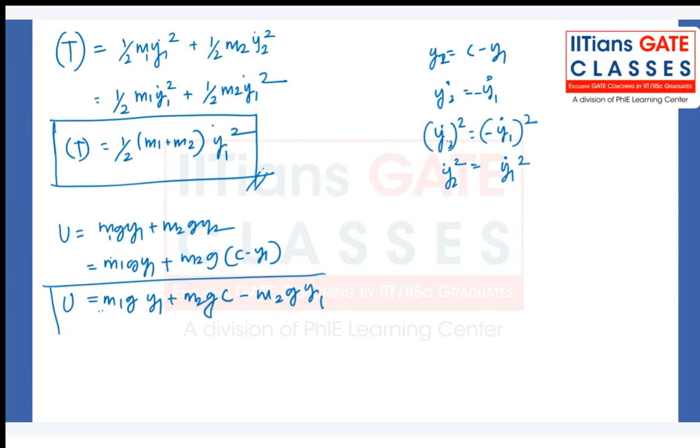So write till this and let me know once you are done, so that I can calculate the Lagrangian and then the equation of motion.

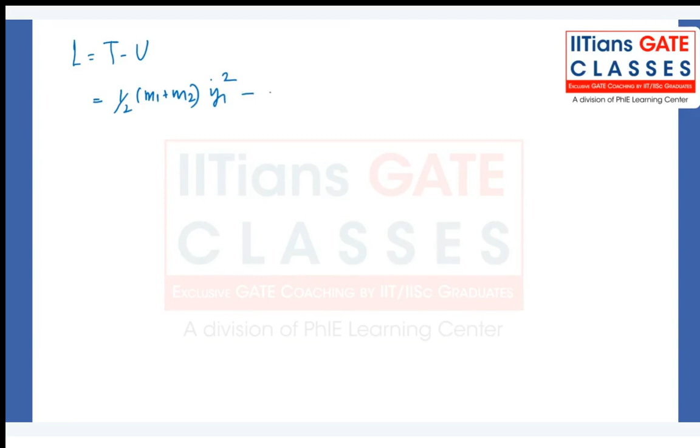Have you solved it? Okay, I'll go to the next slide and help you. L is written as T minus U, and that is 1/2 (m1 plus m2) y1 dot square minus m1g y1 minus m2g c plus m2g y1. Signs are changed because we have minus here, T minus U.

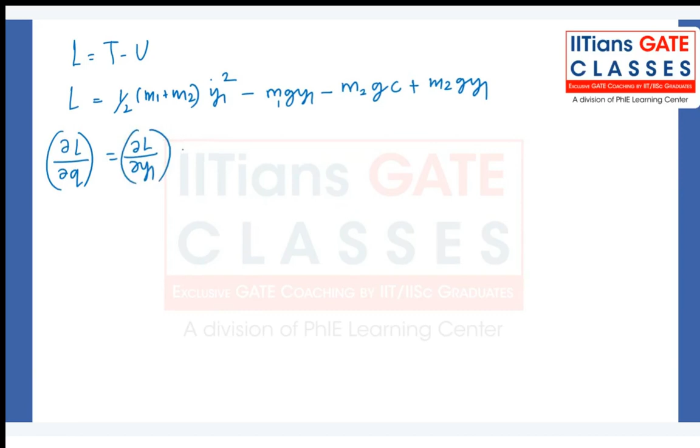Now again you have to take the differentiation of the Lagrangian with respect to Q, that is dou L by dou y1. So only this term will come first. That gives minus m1g plus m2g, so you can say (m2 minus m1) times g.

Then dou L by dou Q dot will be equal to dou L by dou y1 dot, and that is 1/2 times (m1 plus m2) times 2 times y1 dot. The 2 will get cancelled, leaving (m1 plus m2) times y1 dot. Now let's differentiate this again with respect to t, which gives (m1 plus m2) y1 double dot.

So now if you put it into the equation, what is our equation? D by dt of dou L by dou Q dot minus dou L by dou Q equal to zero. This is our Lagrangian equation, which gives us the equation of motion. So it will look like (m1 plus m2) y1 double dot minus (m2 minus m1) times g equal to zero.

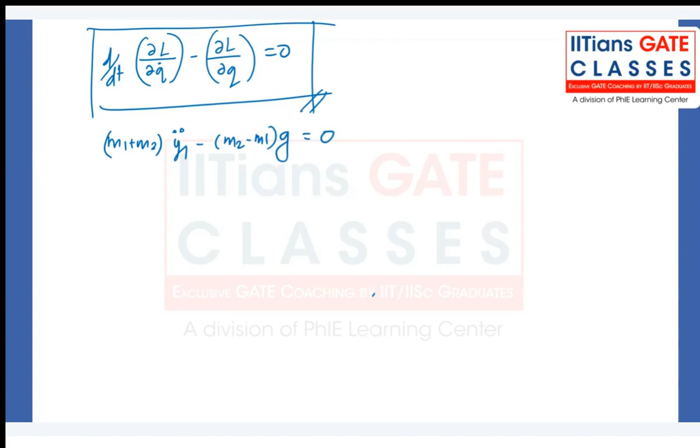So y1 double dot is equal to (m2 minus m1) divided by (m1 plus m2), times g. Okay, so this is how the answer will look. Is it clear? This is how you'll calculate the acceleration.

So as you can see, in the majority of questions, what we are doing is calculating the equation of equilibrium, the equation of motion in this case, and that will help you calculate the natural frequencies or how the acceleration will look, and then you can solve it to get the displacement using mathematics, that is the complementary function and so on.

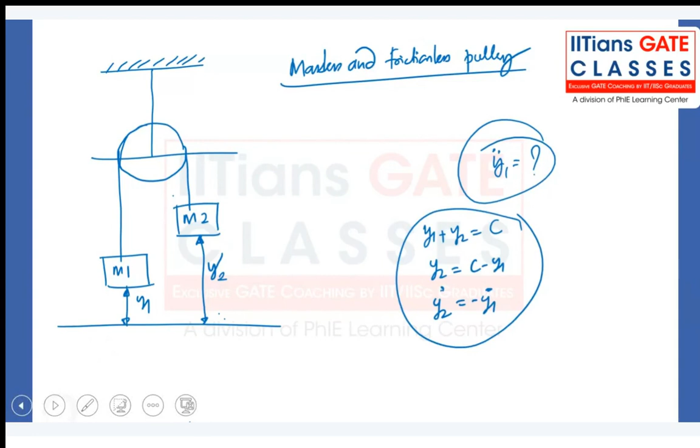Okay, so in order to calculate the acceleration, if I give you this problem, you can easily calculate with free body diagrams and applying the equations of dynamic equilibrium to it, right? But now if you are using this Lagrangian approach, it takes little time. You have to first calculate kinetic energy, potential energy, put it into L, differentiate it, put back again in the formula.

So a lot of steps are involved in it, and it is little time consuming. Whenever a question comes in GATE, they are not asking you the specific method that you have to solve with. They are simply asking you the question, and you have to apply whichever method you feel. So for normal questions, majority should be done with the normal Newtonian approach. You should not use the Lagrangian approach.

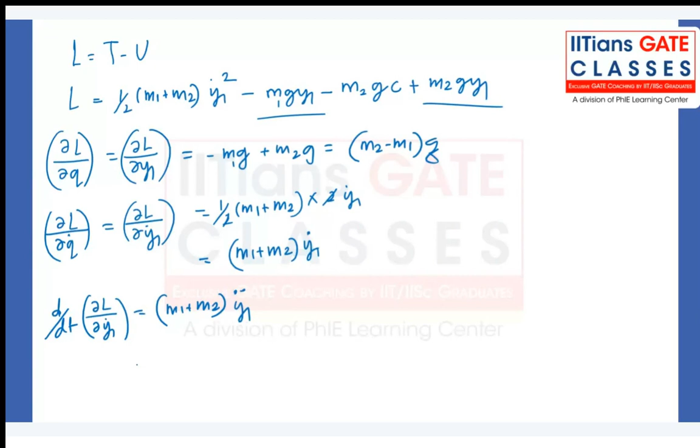Only maybe in vibration topics you will study it when you study that subject. In those situations, this concept is helpful. But now I hope you are aware of the process to calculate or generate the equation of motion.

Is there any doubt in these two topics, virtual work and Lagrangian equation? Both are optional topics, not a compulsory topic or compulsory method to solve the problems. That is the reason we kept it at the end, because they will not affect the overall understanding of the topic. They are just alternative methods to solve the problems.

Okay, is it clear till this? Anyone have any doubt? No doubt.